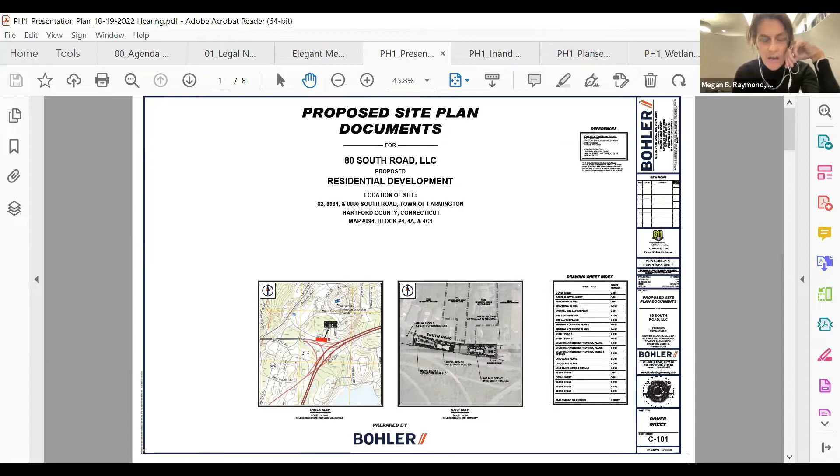Great, thanks a lot, Tim. Good evening, everyone. For the record, my name is Megan Raymond. I'm a professional wetland scientist and registered soil scientist with SLR. As you are aware from our first meeting, we described our involvement with the property. Bruce, could you please put on the next slide?

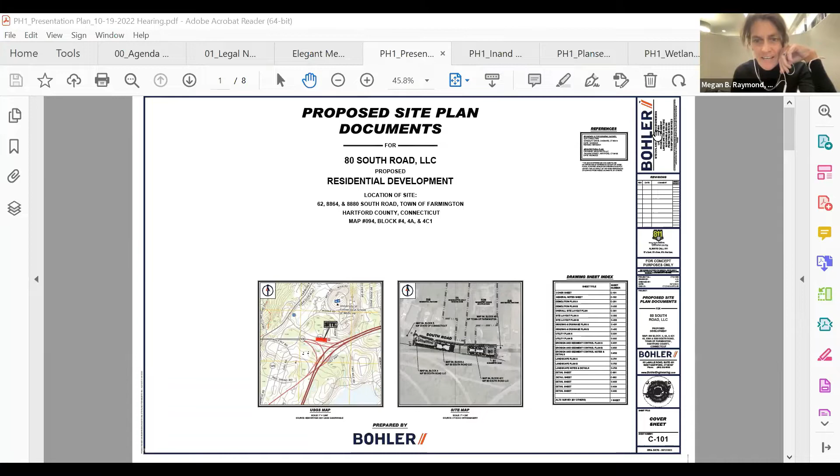I think we might have an existing conditions slide, maybe the one with the aerial on it. Perfect, this is great, thank you. I became involved in the site actually, well...

...at the 8864 site, the central property, in 2018 for the Andy's Italian Kitchen application. But what we have here tonight, and obviously we have north pointing straight up on this map, the project is comprised of, or the site that we looked at, the study area, is 3 parcels: 62 South Road at about a half acre, 8864 South Road at a little over an acre, and 8880 South Road at 1.4 acres to the east.

Two wetland resource areas exist on the site. We have a forested wetland system with poorly drained Wilbraham silt loam soils derived from glacial till, and then a drainage corridor with ordinary high water demarcated that flows approximately 110 feet to the south through the site.

This area picks up some drainage, and it looks like it was ditched. There's a wetland system between Middle Road and South Road. It enters the site with twin 36-inch pipes, exits the site or a little bit off-site to the south, adjacent to the I-84 connector, through a twin 36 plus a 12-inch pipe at that point. Drainage from this area is then conveyed south onto Batterson Park Pond, with the Connecticut River as the eventual fate of drainage from this area.

The topography on the site is relatively flat, but we do have a slight pitch to the east on the western side of the wetland, and to the west on the eastern side.

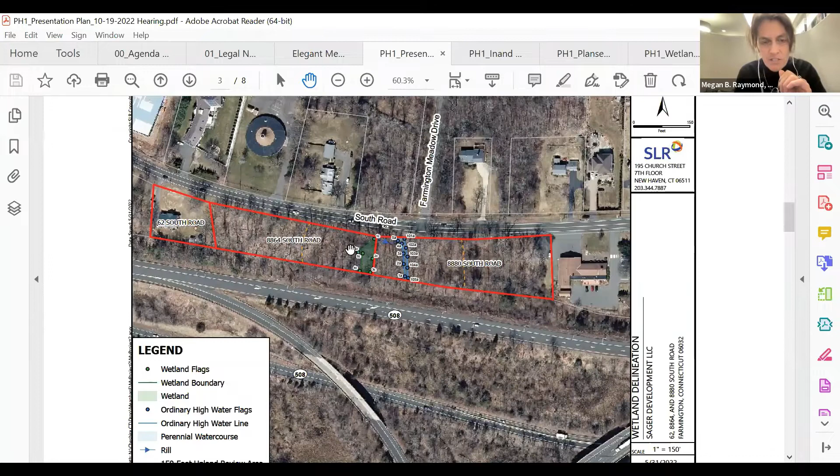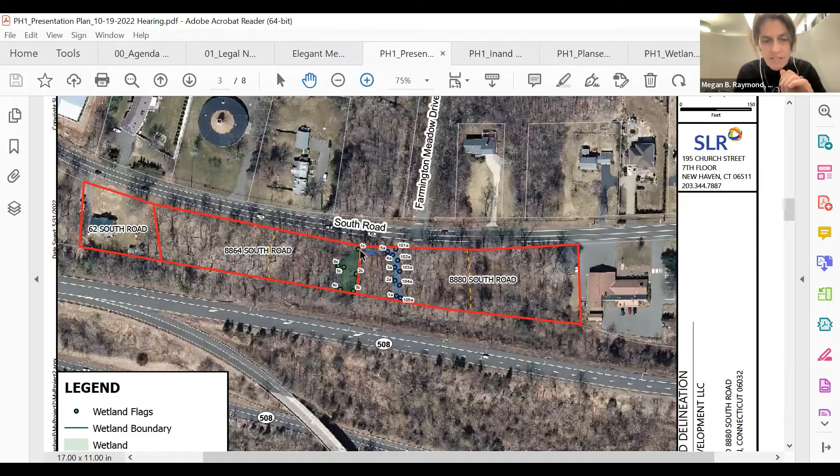Functionally, in this forested drainage area of about 2,000 square feet—quite small—we do see seasonal inundation of about a 12-inch water column. Because of that, we went through in 2021 and completed a vernal pool investigation, comprising site visits during the seasonally opportune time to identify breeding amphibians. We did not see any indication of that.

With our site visits, morphologically it's potential, but the water column is quite shallow, and we're looking at a fragment of habitat here given the amount of development to the south, north, east, and west. Functionally, the wetlands do provide some nutrient assimilation with the depression.

The primary function of the watercourse is generally conveyance, and the functionality of these systems is somewhat constrained by their size.

Overall, collectively, the 2.92 acre project area has wetland resources between the watercourse and the wetland occupying about 2%, but we're looking at about a 44% occupation of the upland review area that extends to the west and east. In between, we have about a 0.2 acre area of upland between the watercourse and the wetlands, demarcated by a shallow stone wall.

That is a summary of the existing conditions, and I'll turn it to Jeff to describe the site plan. Thank you very much.

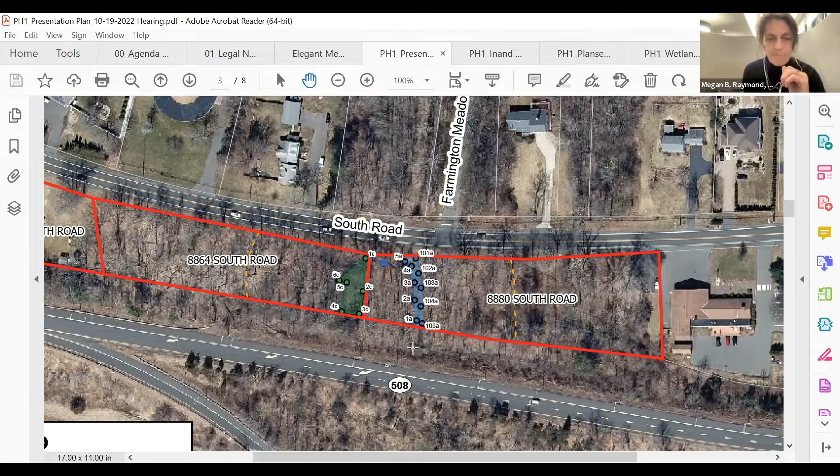Thank you, Megan. Bruce, can you go back one slide to the overall site plan? Good evening. For the record, my name is Jeff Bord, professional engineer in the state of Connecticut with Bohler Engineering, located at 65 LaSalle Road in West Hartford, Connecticut.

I have over 16 years of civil engineering experience in a variety of sectors, including the nature of the project before you this evening. Our office prepared these site plan documents that are before you. As Megan described, existing conditions consist of 3 parcels: 62 South Road, 8864 South Road consisting of 1.57 acres, and the 8880 South Road portion to the east consisting of 1.35 acres. North is to the top of the page on this exhibit.

What you're seeing here is an overall site plan depicting the 2 buildings and the 2 multifamily residential structures that flank either side of that existing channel Megan described. Building A to the west is a 36-unit, 3.5-story structure with a footprint of 11,350 square feet, while Building B to the east is a 3-story structure with 29 units consisting of a 10,425 square foot footprint.

On the left-hand side, Building A, we provided 2 full access driveways onto South Road, where we're proposing 52 parking spaces, 2 of which are handicap accessible. We've also provided an amenity space to the east of Building A consisting of porous concrete, along with several patios for the ground floor units.

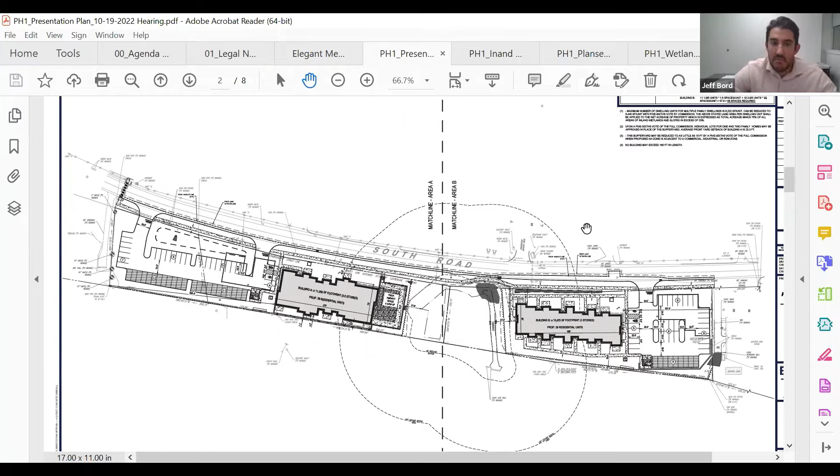Building B to the east has just the one full access driveway onto South Road. We're proposing 52 spaces, 2 of which are handicap accessible, and we have similar porous concrete designed in conjunction with town comments we've received to the south of both buildings A and B.

We do appreciate that Farmington is one of the few towns that goes through such a thorough review, and we really feel that it provides a lot of value to the project and the overall plans itself.

So to Megan and Tim's point, we did receive that letter last week from Bruce and staff. We've gone through all of those comments and are confident that we can address all of them and submit a response to the comment letter that basically says exactly that and what the plan changes are. We're also confident that the plan changes from what you're seeing before you this evening will be rather minimal, even though there's quite a number of comments that we're going to be running through.

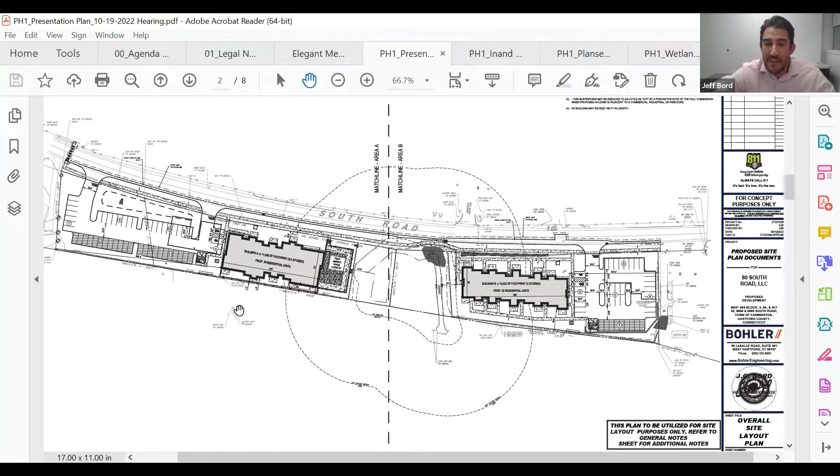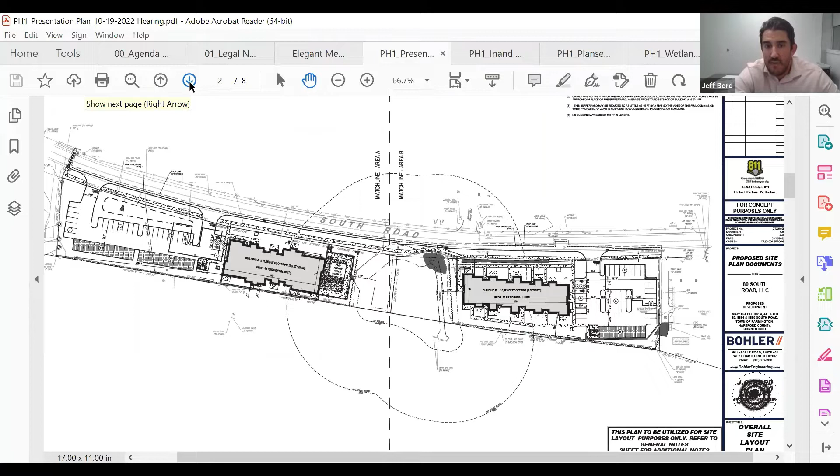With regards to stormwater drainage, starting on the building A side, and holistically for the entire development, we have complied with the 2004 Connecticut Stormwater Quality Manual, as well as the MS4 permits currently in place in town. We did our best to match the existing drainage patterns on site, which currently drain on the western side, going from north to south, then flowing east to the existing stormwater conveyance. On the eastern side of the site, it also heads north to south, but then heads west towards the existing stormwater conveyance culvert. So both properties collectively head towards the center of the site to the south, and then go under those two culverts that cross underneath I-84.

So what we looked to do from a design standpoint is basically match the existing flow patterns that exist on site. We looked to reduce the peak flow rates for the 10, 25, and 100-year storms. I believe one of the comments we got last week was to also include the 50-year storm, which we are happy to do.

There's a series of stormwater BMPs that, on a site this small, a lot of times we're not able to incorporate natural and subsurface structures. In this case, we were able to include several areas for above ground infiltration. We have a couple of below ground infiltration basins. We were able to introduce porous concrete on the south of both buildings in the parking areas and in the amenity space. On building A particularly, we incorporated a swale along the front of the building, between the roadway and the building itself, that went into a series of two rain gardens prior to exiting via a level spreader into the wetland area there. So the goal was to mimic existing drainage patterns on both buildings A and B, respecting the wetlands and the like.

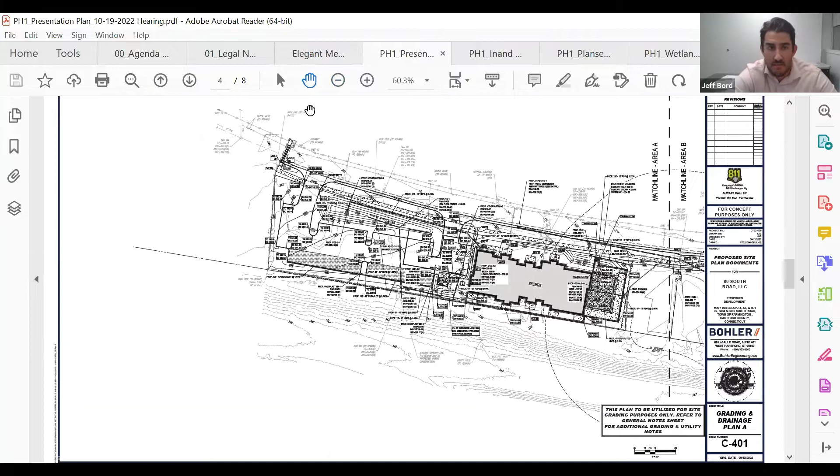So we prepared this slide, and it's basically just a blow up of the existing grading and drainage plan. What you're seeing in red, and it's kind of hard to see on this plan, is the red tree line. Those are basically from the previously approved drawings that this commission had approved a few years back for both of those applications. We just wanted to show that we started with that in our design plans as far as where we were laying these buildings out, to try to respect that even further.

So on building A, we shifted it even further to the west, away from that tree line, and it gave ourselves a decent buffer up against that wetland boundary there. Similarly, on the east side, we went through multiple iterations, and by the third iteration we kept kicking it further to the east to get even further away from where that previous line of disturbance was.

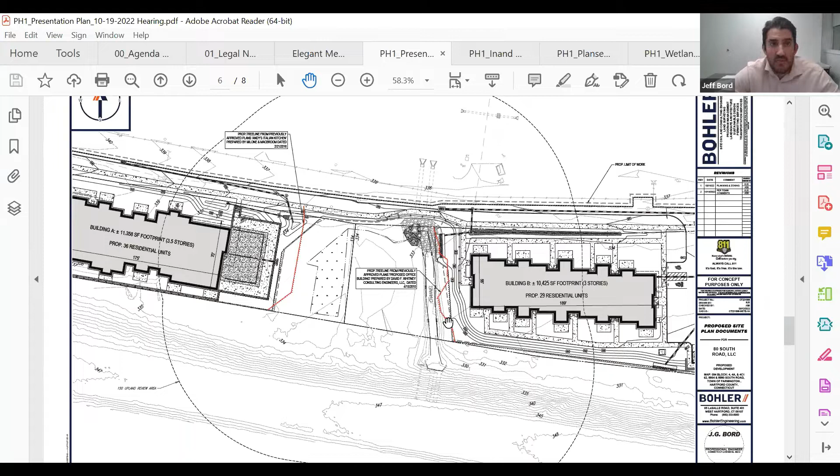We did implement a soil erosion and sediment control plan that is consistent with the Connecticut Erosion and Sediment Control Guidelines. Basically, we have silt fence along the perimeter. One of the town comments we got was to provide silt socks in addition to silt fence, so we've done that as well. We'll have inlet filters on all the catch basins, and a temporary construction entrance and soil stockpile surrounded by silt fence and silt socks as well.

And that's a high level overview of the civil drawings. At the end of the day, we're not disturbing any wetlands directly.

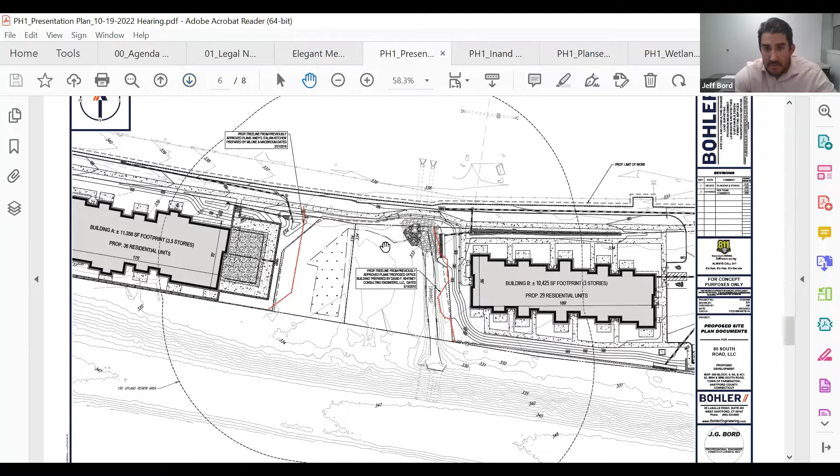I think part of the feedback we received, and an important piece of feedback, was, if you zoom in right there where your hand is, from our site walk, the commissioners will remember, originally we had a drainage design that discharged the curbed roadway runoff from the DOT highway directly into that culvert there.

When we were on site, I know that entire area of riprap had been eroded away and destabilized, if you will. A lot of the commissioners had concerns and requested that it be replaced. So on the set of plans that we'll be revising, in addition to addressing Bruce's comments, we'll also be proposing to repair that riprap and stabilize that channel back to what it should have been under the proposed condition.

On top of that, as you can see in this plan, particularly on the west side for building A, we've pulled back that discharge point from the DOT right-of-way into an actual rain garden on our site that will then overland flow and level spread into that wetland area. On the east side for building B, we did something similar, where instead of a direct connection with a flared end section that could potentially erode that bank further, we provided a level spreader with a slot drain that comes out to discharge just that little infiltration row in the front.

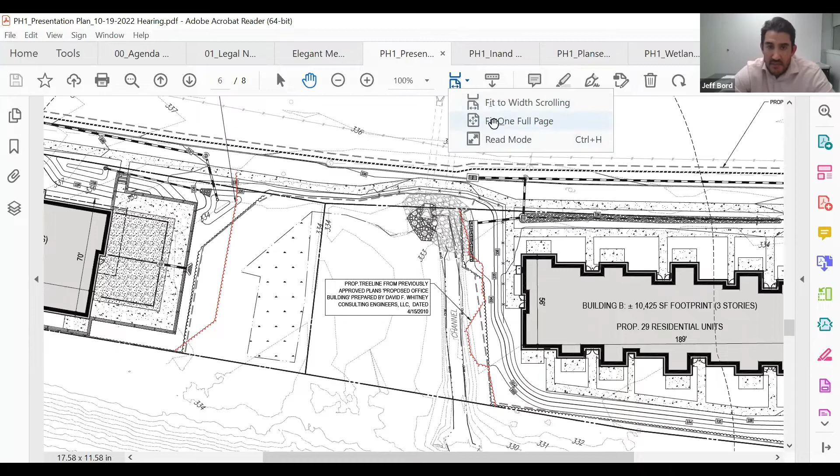So that's a very high level of input we received from that site walk that I feel will benefit the project moving forward here. So with that, I'd be happy to turn it over to Megan. I think she was going to close with some of the wetlands information here, and I'll be happy to answer questions after Megan's complete.

Great, thanks a lot, Jeff. So just to advance Jeff's description here as it relates to wetland impacts, since our last meeting we did prepare a wetland impact analysis that focuses in on the potential modifications to these resources as a result of this site work. As Jeff described, we do not have any direct wetland impact for the project. There's no direct impairment of the wetland area or the water course.

So when we then look at potential modifications to these resources, we focus on indirect impacts, and those relate specifically to stormwater management and sedimentation and erosion control. The site is long and linear, but there are a lot of opportunities, and Bohler's done a great job incorporating low impact design elements to allow for improvement of water quality, while also addressing the potential modification with increase in impervious through additional stormwater volume.

Both of those features in combination will allow for maintenance of hydrology of the wetland, as well as maintenance of water quality within this small watershed, which is about 0.16 square miles of overall watershed that we're looking at holistically for the site.

The site lies within that area. Sedimentation and erosion control is going to be managed on the site. Obviously we have a very flat site, so that works well with that. The use of retaining walls will also serve as permanent demarcation and assist in sedimentation and erosion control in that regard.

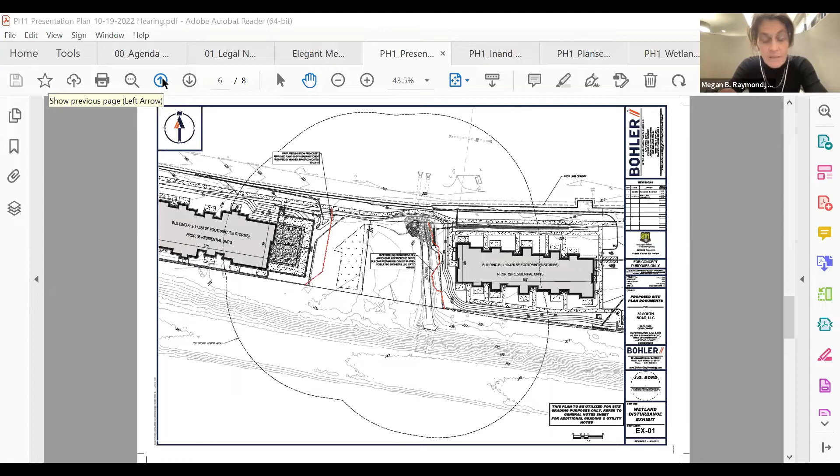So there was a lot of thought looking at the site in laying out the property and the project to maintain buffers to the wetland and the water course. The 8864 and 8880 sites both have previous approvals on them. 862 South Road has no wetlands, no upland review on that parcel, but obviously a single family dwelling was there.

But the limit of disturbance was an important exercise to overlay, just to make sure that we weren't doing any additional encroachments into the tree line that wasn't previously approved. And we actually provide a little bit greater buffer to the wetlands.

Looking at the drainage channel specifically, early on, given its feature as an engineered feature, there were potential thoughts of piping that and having an ability to access the site inter-site—not use the sidewalk, not use South Road, but have an inter-site connection. But looking at the functionality of it, even though it's small, that alternative was considered and discarded because we could maintain the corridor, maintain the resource in combination with that little bit of upland between them, and also achieve the project purpose of increasing the housing typology in this part of town.

So holistically, we're looking at this project as no adverse impact to wetlands and water course on the property. We did run through this before, but in terms of significant activity, we did evaluate the activities as it relates to significance as stipulated in your regulations. Obviously, we have no direct wetland impact, so we don't have any deposition or removal of material from the wetland or water course. We're not modifying the natural channel or dynamics of the watercourse.

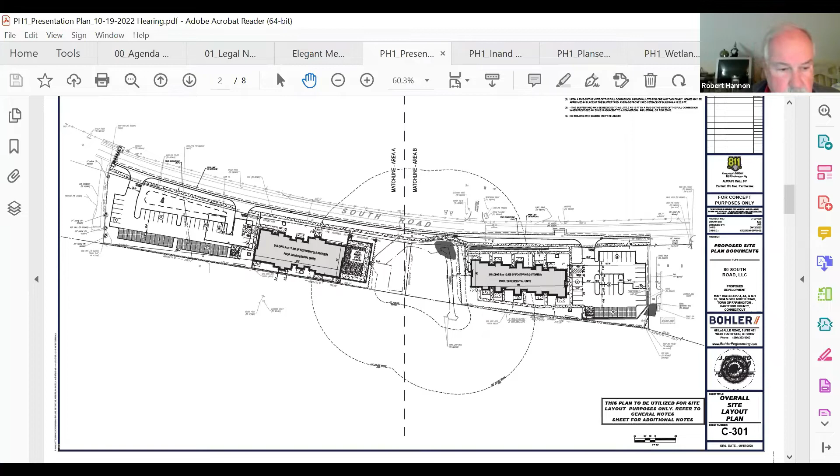There you go. Bruce, can you hear me? Yeah, I was trying to get to my unmute. Okay. I thought it might be me. I really don't have any specific questions. I just was looking at the areas where the drainable bituminous is being used.

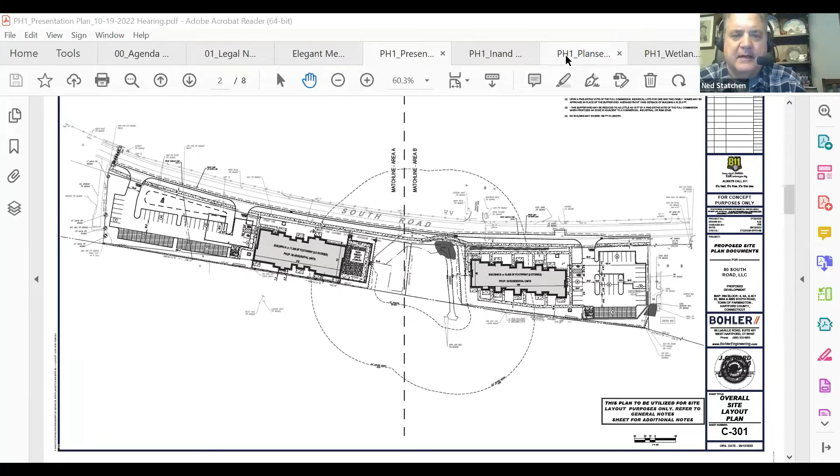I guess a little more information on how that works, and how do we be sure that the material that makes up the bituminous mix doesn't, with the water going through it, leach any kind of chemicals into the soil.

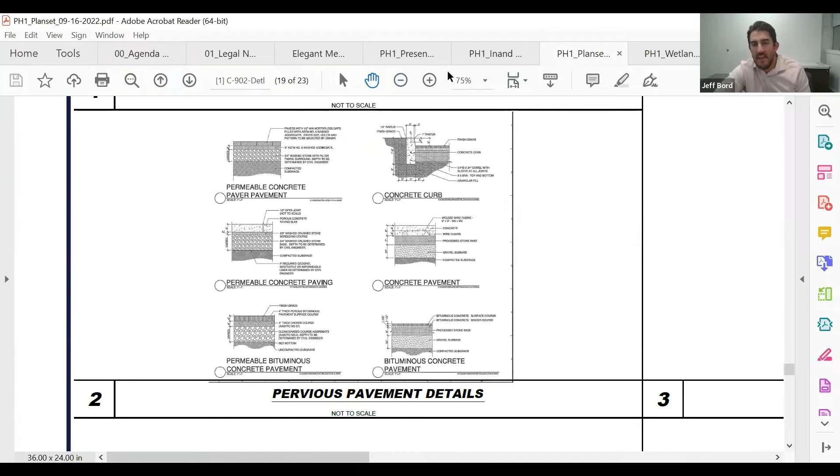Yeah, I can take that. I know that was a comment we received early on in trying to incorporate these natural BMPs. We provided an under drain as an added measure, and this was done at one location in town that worked rather well with the manufacturer that installed it. We provide an operations and maintenance manual for the cleaning and vacuuming of those pervious areas. The under drain basically takes that storm water and puts it into an underground infiltration system with a sediment forebay and an isolator row within it to treat water quality. So there's a belts and suspenders approach with regards to that porous concrete. At the very south end of that parking structure, where that porous concrete is, there's a perforated pipe that carries that water to the underground system.

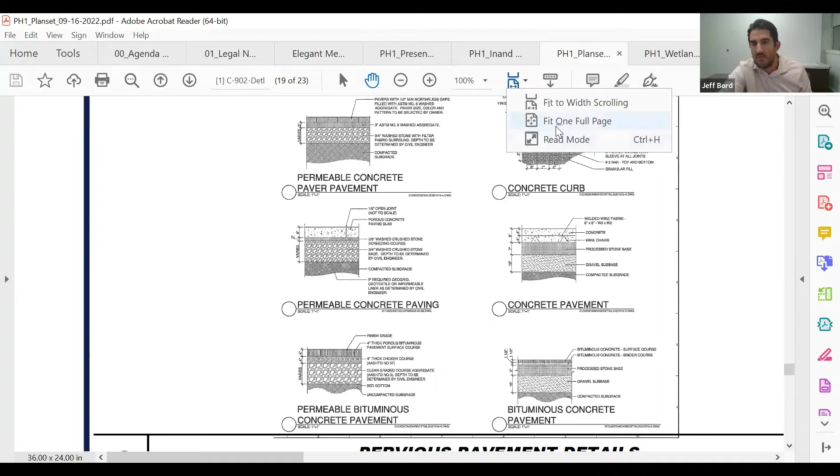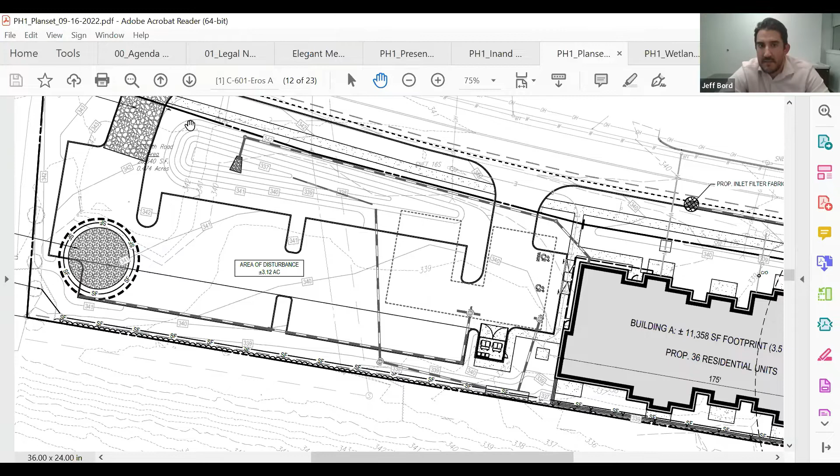I was blanking on the name of the coffee shop, but I think it's Rebel Dog Coffee that implements it, and it was well done at that location not too long ago. Here's the pipe, here's the permeable pavement underneath. It comes in and then into the storm drain system right there. Does that piping handle the roof drainage as well? The roof drainage in this case, given the space we had, goes over to the infiltration basin we provided in front. We don't have a wild seed basin mix associated with it. Okay, thank you. You're welcome.

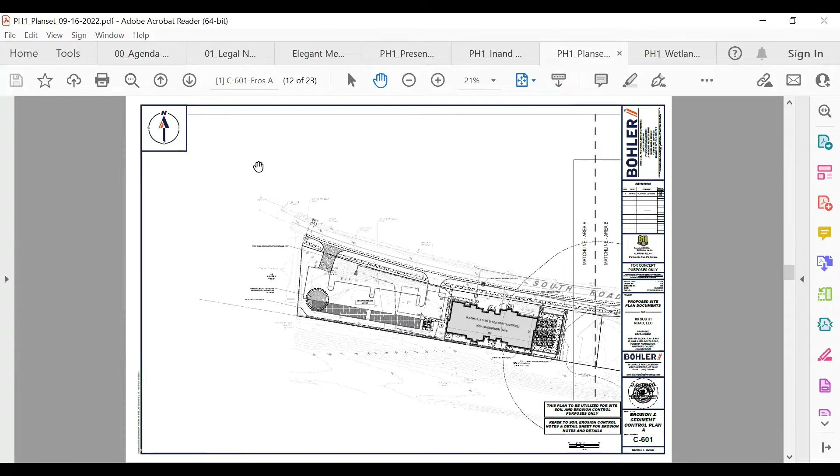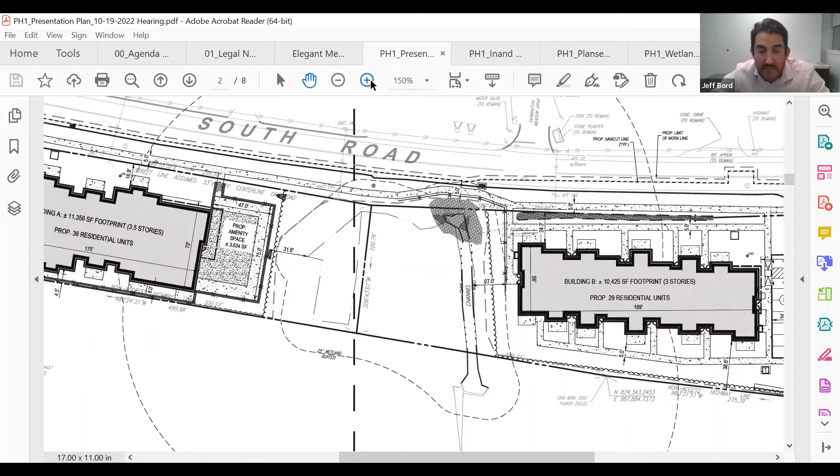Okay, thanks Ned. Mark? Yeah, the only question I have - I realize both buildings are within the 150-foot review area, but how close is any construction to the wetlands area and the watercourse? It's hard to figure out what the distance is. On the west side in particular, it's close to 30 feet, 31 feet I believe. On the right side, I think it's close to 25 feet, 27 feet. Yeah, 27, that's what it says. All right, I can see it better now. Thank you, that's all.

Thanks, Mark. Robert?

I don't have any concerns. I think the project team, specifically Jeff and Megan, both tonight at the public hearing and also during the site walk, covered the project well. I think the information tonight addressed the indirect impacts, and the project team took into consideration all the normal items we would look for. So I don't have any concerns about the project. That's the end of my comment.

Okay, thanks. Neil, I may have done it out of order, but you're next. It's okay.

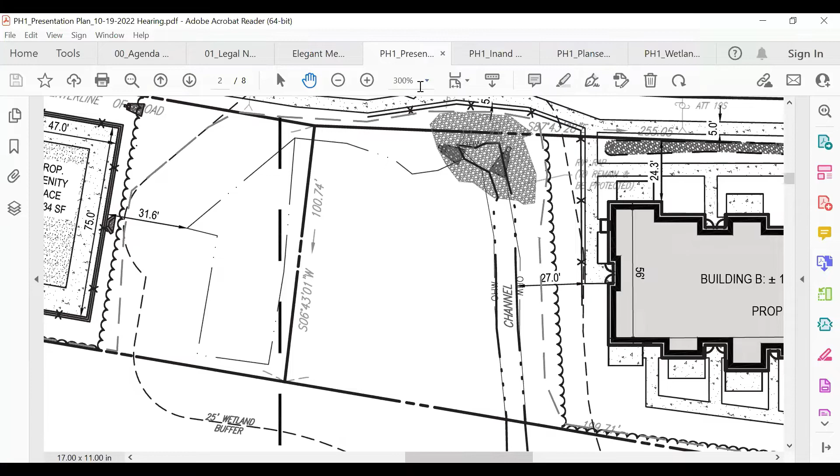Just going back to the permeable bituminous, will traffic or cars be parked on top of that, or is that off the side of the parking lot? And number two, you showed us where it went through piping underground on the west side. Can you illustrate that on the east side as well, please?

Sure can. So there is parking on top of it. It was similar to that Rebel Dog Coffee application, where on the low side of the parking lot, you incorporate that pervious asphalt. Similarly, there's a dashed line towards the north end of that parking lot on this plan.

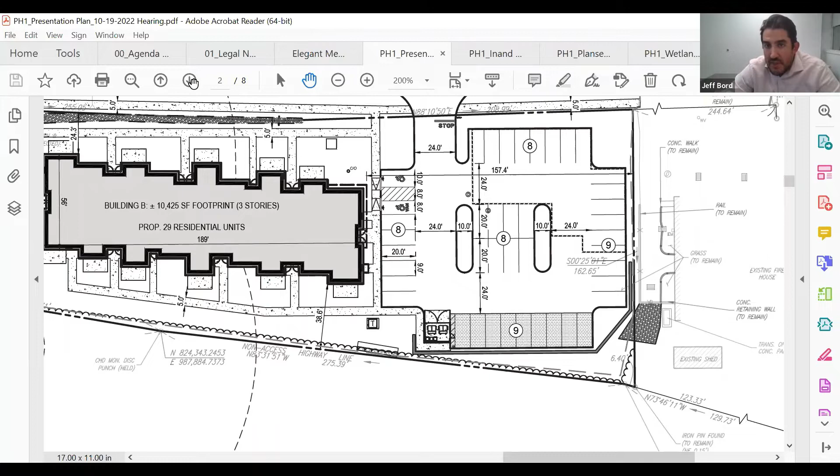If you go up to the top right, Bruce. Right in there, there's a dashed line. That's the underground detention. So similar to the other side, that infiltration, there's a perforated pipe that goes into that basin before discharging to the level spreader just to the bottom or south of that transformer.

If you zoom in. There we go. Down this page, next page. They're both very similar in how they connect to that porous pavement.

So if you zoom in on that, there's a pipe that comes from the porous asphalt up into the underground detention system. And then there's an outlet pipe that goes down to a level spreader that basically discharges the surface water to where it's currently going today. And then it goes through a natural swale along the southern property line into that existing culvert. So there's multiple measures of water quality treatment throughout the process prior to it getting to the channelized stream that's there.

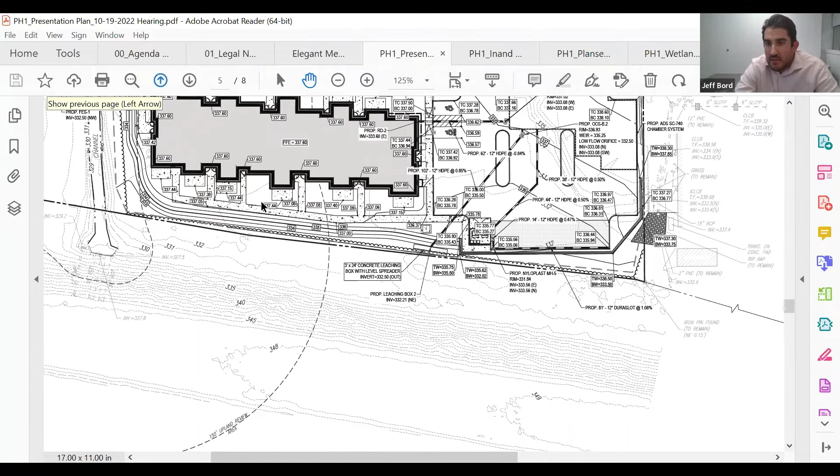Okay. And maintenance on that, you know, with cars on top of it, compression, things like that. Any thoughts on maintenance and how often it might need to be replaced or repaired?

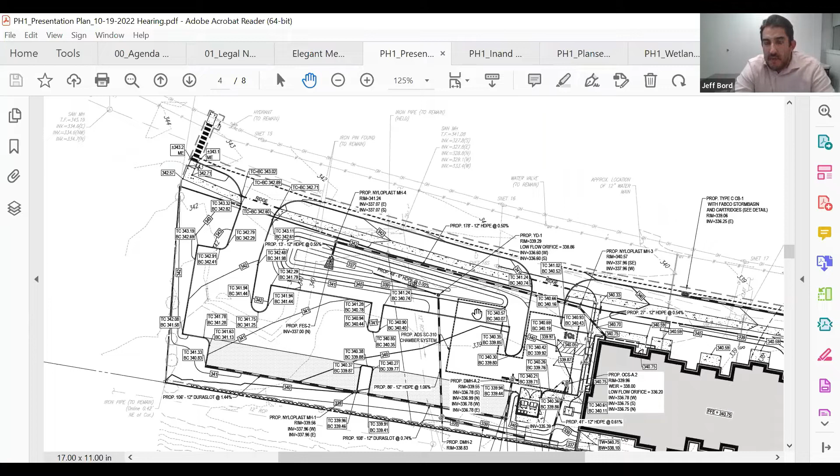I'll double check, but we do prepare an operations and maintenance manual as part of our drainage report, and it gets buried in the back of a 400-page drainage report. But in that document, it describes the measures for the contractor and owner to take as far as all of the stormwater BMP - not just the pervious asphalt, but the catch basins, the rain garden, the underground detention systems. Basically what it does is there's a frequency of cleanings and methods to clean out these different structures at various times. It might be biannual. I'd have to look to see, but it's at the manufacturer's recommendation as far as the vacuum truck that comes out to clean it.

Neil, we usually require this to be vacuumed. These parking lots don't get swept anymore. Because it's permeable pavement with an open grade, they come through with a vac truck and they'll actually vacuum out these areas.

Okay. Any concerns about settling, or does it have to be rebuilt over a period of years since cars will be sitting on top of it?

Personally, I don't have concerns with that. I think the product has come a long way. I know from experience, up in New England, it hasn't been used quite that much. I think in the future it's going to start to be utilized more often as they perfect the product, and more contractors become familiar with laying it down. Some of the earlier installations were rough in the sense that contractors didn't know how to install it. I think, as you've seen at the Rebel Dog Coffee, that's proven to be installed very well, with good success. So I think it's something you'll start to see incorporated more and more, even up in New England here.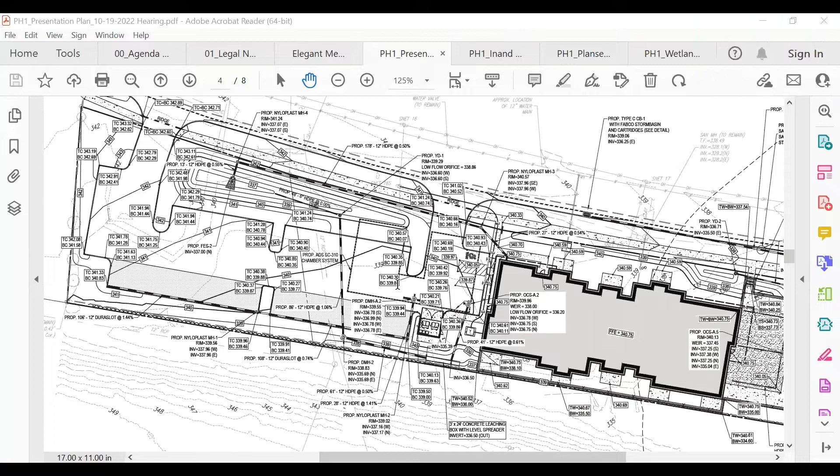Okay, thank you. Was that it, Neil? Yes, nothing further. Okay, thank you, Dave. No questions.

Bobby? No questions. I think it's a very well thought out program, with great explanation, both here and through the walkthrough.

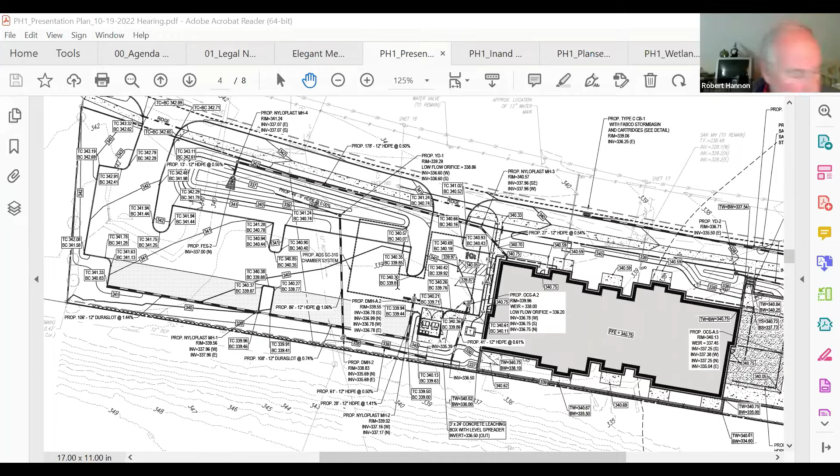Okay, as usual, I have some questions. Part of what was discussed dealing with the parking lot. Can you talk briefly about snow removal and then any type of treatment that might be applied to the parking lots in the wintertime?

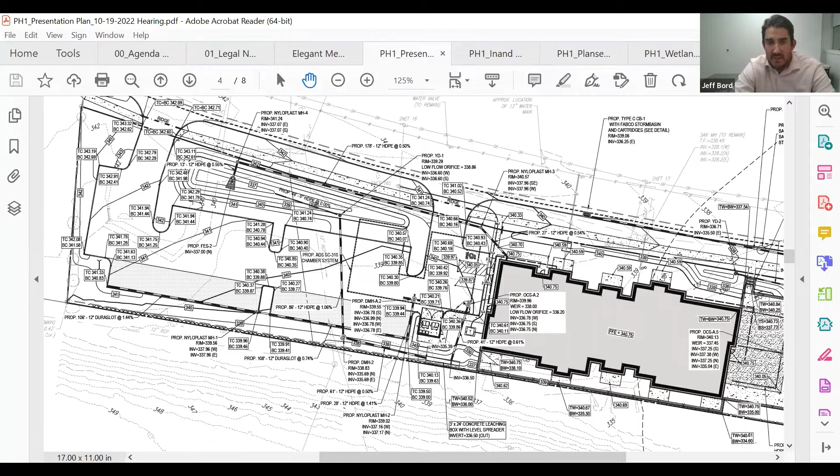As far as the treatment, I may defer to Jeff and Phoebe here, but the snow removal areas itself, we do provide snow shelves in concert with our landscape architects. Along any of the perimeter parking areas, they provide landscaping that's more hardy and susceptible to having snow piled up. Given how small it is, there are areas along the perimeter where you could stockpile snow. In the event of a 1 or 2 foot event, it may have to be trucked off site depending on where that is.

One of the benefits of what we're proposing with the way everything lays out is that there are multiple areas on site where that snow melt would get into a stormwater basin, which would be treated for water quality, where a lot of projects don't have the benefit of having the stormwater best management practices spread throughout the site. That goes into our site design considerations as far as where we provide curbing and landscaping. So I think there'll be plenty of room for snow storage for a parking lot this small. And then how about the treatment?

The treatment, I don't have that information as far as what kind of treatment is used, whether it's salted or... Well, this is why I'm asking, because for example, if salt is being used, what kind of impact might that have on the wetlands? And if sand is being used, what kind of impact might that have on the pervious concrete?

Chair Hannon, Jeff Bord, can you hear me? Yes, we can hear you, Jeff. Okay, I hear an echo, I don't know why.

We use the DEP approved ice melt. I have to get the exact product name, I forget what it is, but it's not sand and it's not salt, it's whatever that... perhaps you know the name of it. I can get it for the next meeting.

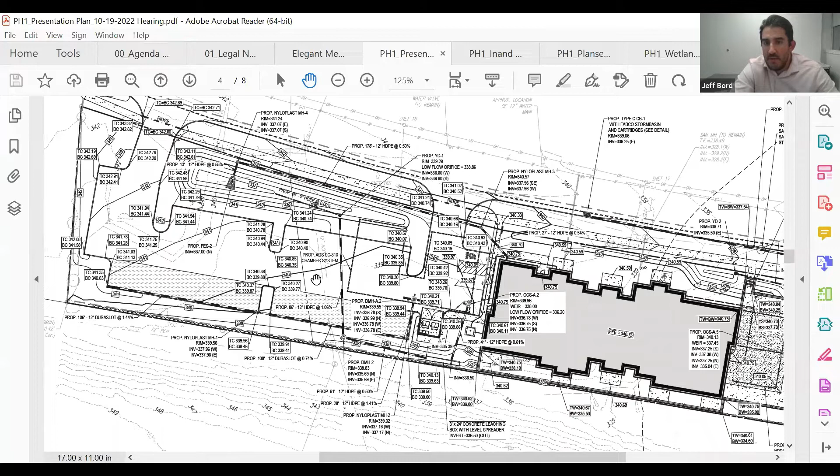Okay, no, thanks. Bruce, can you bring up something with one of the slides where we have a better shot of the eastern building? Yeah, that one is good. If you can blow that up a little bit, please.

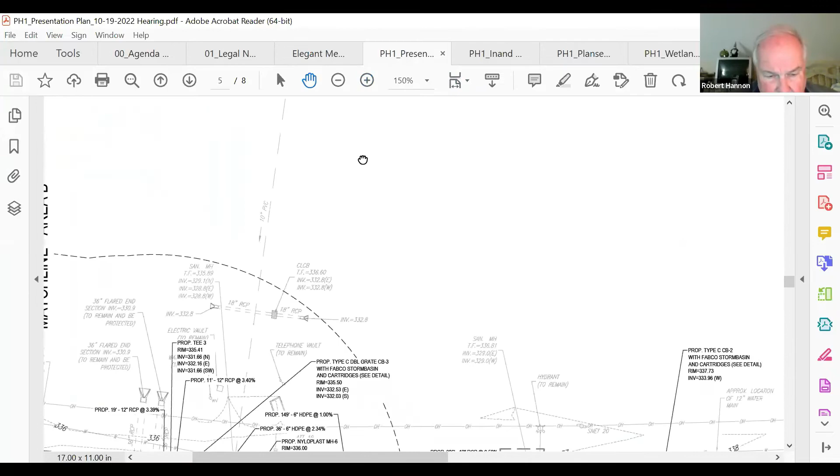This is just a general question in terms of the grading that's being proposed on the site. I'm assuming that there's room there to get both the silt fence, which you're talking about, and the silt socks down at the base of the hill, so that nothing is really coming off onto, I believe that's state property for the highway. So is that correct?

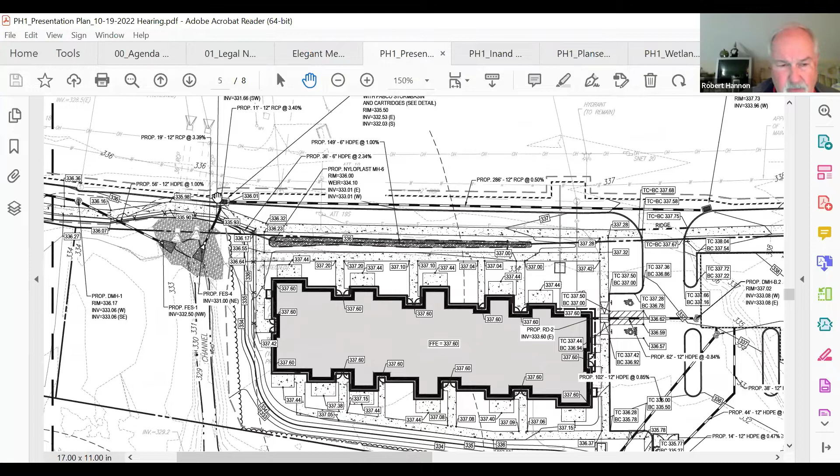That's accurate. Yep. Okay, and then the one other, it's not so much a question, but as my understanding is that the drainage pipes that are there, they were man-made, installed a while ago. I'm assuming though that the channel was pretty much the same thing. I mean, granted, it's not a pipe, but based on what I remember out there, it appeared to be man-made. There was riprap.

So I'm kind of looking at this as maybe more of a maintenance process to refurbish that area. And yeah, the riprap is part of it, but there also seem to be a lot of growth, smaller trees and things of that nature within that channel area. Are those also coming out? That would be the intent, and specifically in that area.

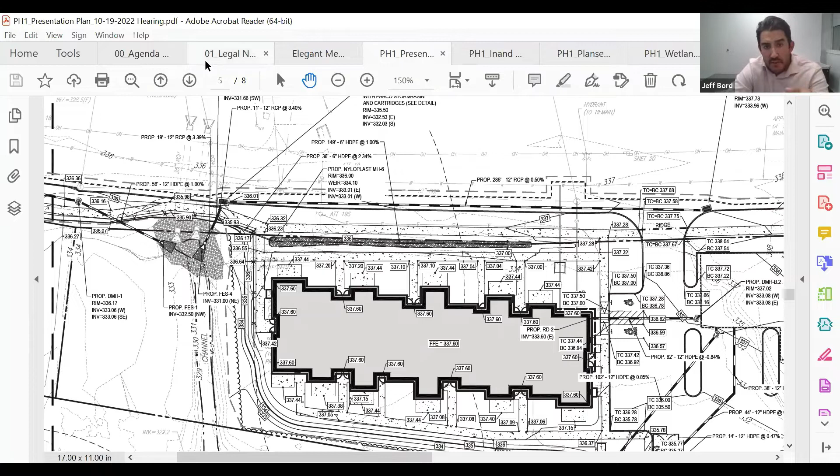Bruce, I don't know if you can go to one of the other plans, this was the old plan. You could see the direct discharges into that area. Yep, that was the initial plan we submitted right from the DOT right of way. The colored rendering had been updated to show what that looked like, or that wetlands exhibit.

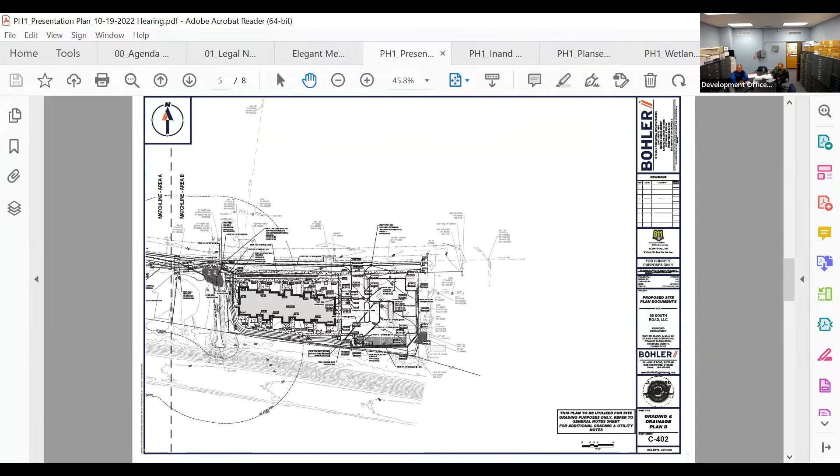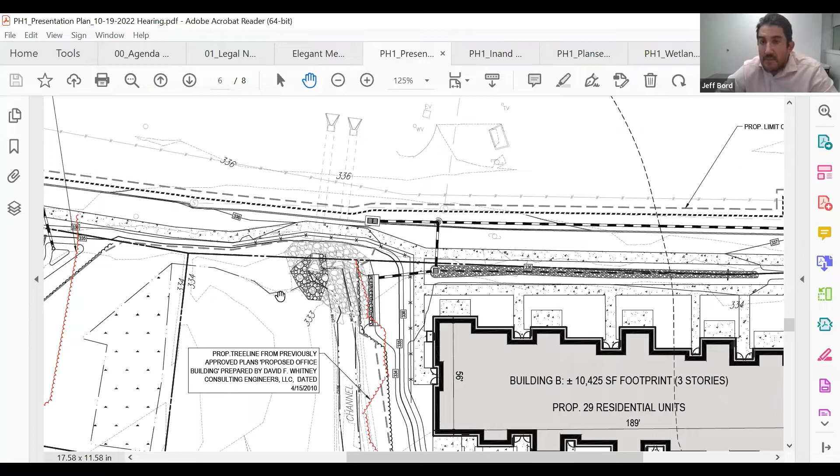If you zoom in on this, I think this one had been updated for our new stormwater plan. You can see those direct discharges are now gone. That area of dark riprap was the area in the field we identified, where there was some plant growth, but basically just soil where riprap should have been had washed away, and there was nothing there. So the intent is to clean that whole area up and put back the riprap that should be there, to help stabilize that channel.

Okay, and when we were at the site, if I remember correctly, there also appeared to be a drainage swale located along where the sidewalk is being proposed, draining into the area where the riprap is gone. What's happening in that area - you're picking up some water off the street and redirecting it, but what about that swale located close to the road?

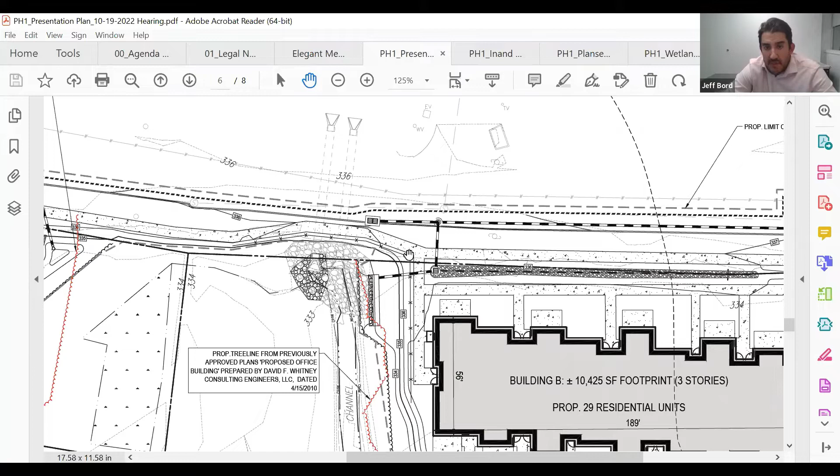Yeah, that's a great question. On building B, what we have on screen here - you see there's a hatch right in front of the building, a stone hatch with a little yard drain. Because we're curbing this, we're taking the water from the DOT right of way and connecting it with conveyance systems into that infiltration trench. That infiltration trench we provided in the front will help treat water quality from the roadway and the area that was swaling, prior to it discharging into the existing culvert.

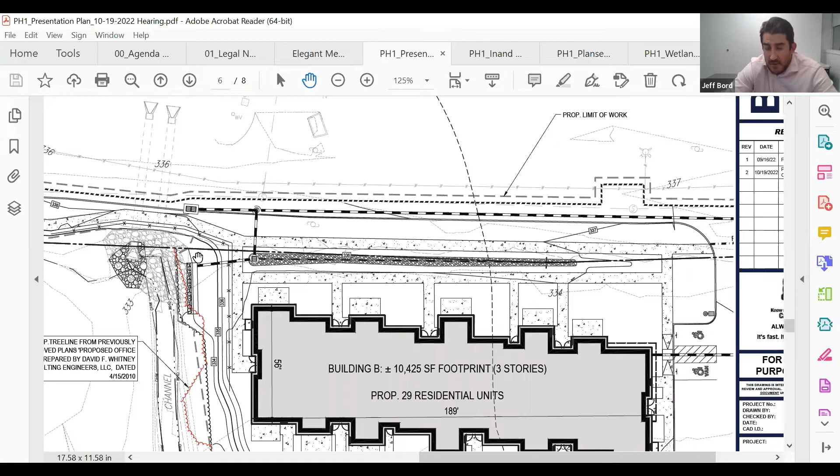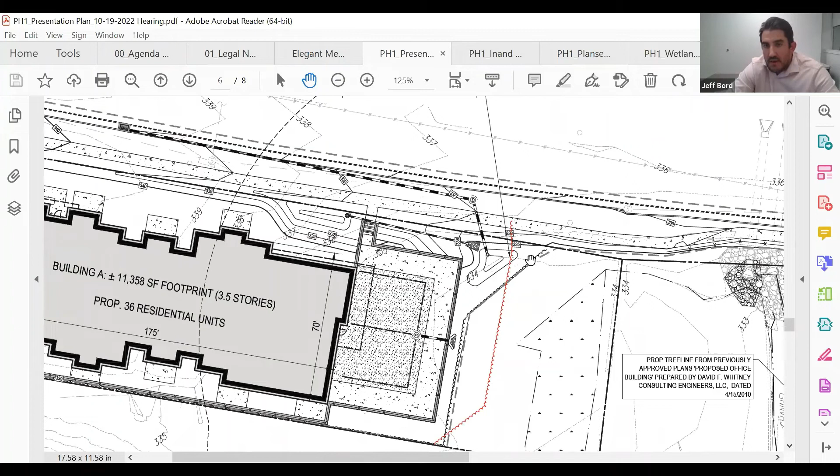On the building A side, the west side of the site, we had a bit more room to play with, so we were able to curb that street as well. We provided a swale on the south side of the proposed sidewalk that makes its way into that rain garden. In concert with comments we received from you folks, we piped that to another rain garden, which will overflow into the wetland area about 30 feet away from the wetland, so there's no longer any direct impacts over toward that area. In both cases, we took those existing swales and proposed natural stormwater features to reroute it.

And if I'm not mistaken, I believe that swale was caused by a low point in the road with no curbing, so that's where water concentrated its flows. Correct. So now we've designed catch basins within the state right of way, which will have to be reviewed. Once we get through local approvals, we'll submit to the DOT for an encroachment permit, where they'll review the curb cuts and drainage associated with this. They'll be very interested, especially given that most of their drainage now flows untreated onto our site, and the fact that we're doing stormwater conveyance in a DOT right of way. They'll thoroughly review the stormwater, as well as the town staff.

Okay, that's all that I have. Thank you for the answers.

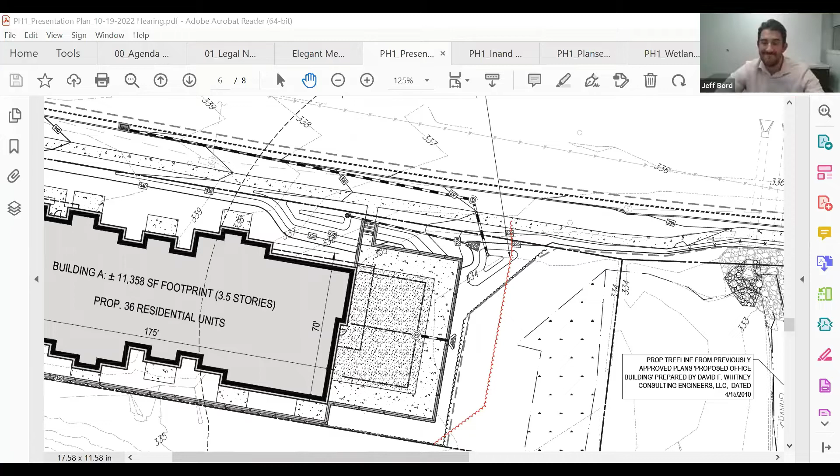Next one is 114 Red Oak, but I'm not seeing any of the applicants online here. Oh, sorry, Dave's with the 80 Colt Highway application I think. Yeah, no, it shouldn't be. I know, I just don't notice that, but I don't see it on here.

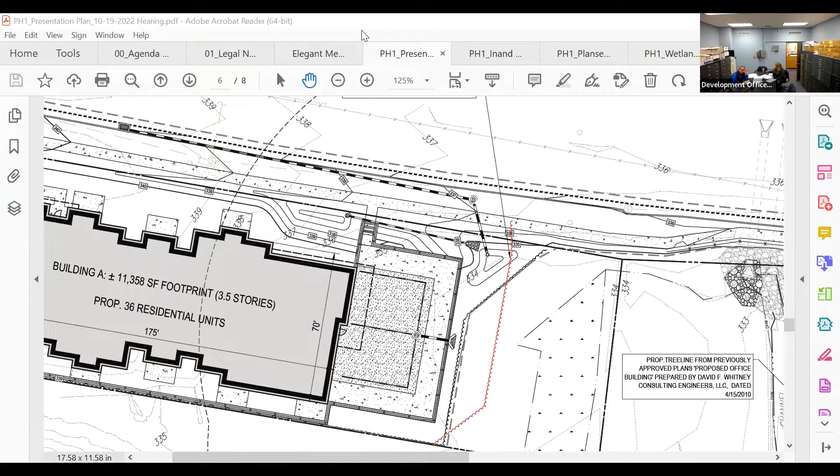Is anyone here for the Copper Mine Road application? I guess not. I sent them everything too. Well, they might have been taking a gamble that the public hearing would go longer too. Could have. We'll see if they're there at the end.

All right, so we'll table that one for now, I guess. I don't need a motion to table it, right? No, because we're not gonna take it up right now, we'll take it a little later. Yeah, we'll see if they pop in afterwards.

Okay, so next on the agenda is old business, Bulwark LLC, lots 8120 and 8122 Colt Highway.

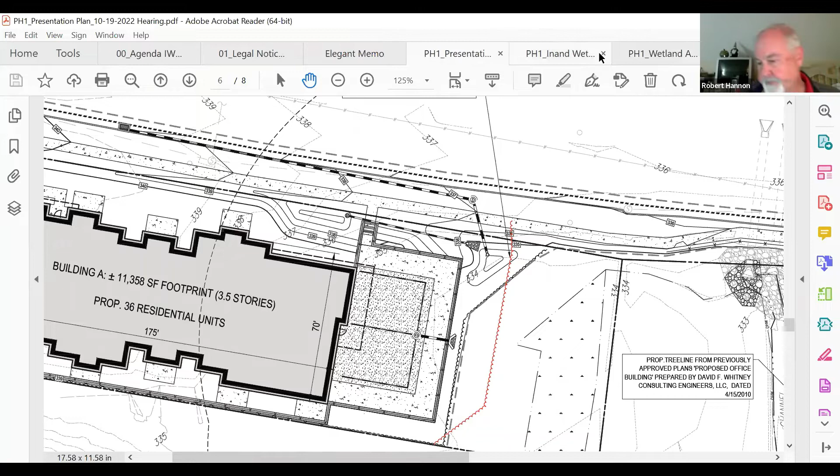This one, and I have the resolutions here. I have the draft for the approval and the draft for the denial. Does anyone want anything else open? I can open up the plan set. How do you want to proceed with this?

Well, I think probably proceed with this, at least as far as just a general discussion to see where people may be coming from on this. So Ned, if you don't mind, the floor is yours. Okay.

Well, I appreciate the designers, several revisions. I know when I was talking, I had asked for several cut corners on buildings and things to try and get a little more clearance away from the wetland lines. And they seem to have addressed all the ones I raised. Again, changing the style of the crossing of the waterway, I thought was a positive, and they enlarged the size of the structure, made it so that we could maintain the natural waterway course. I think that was another good revision.

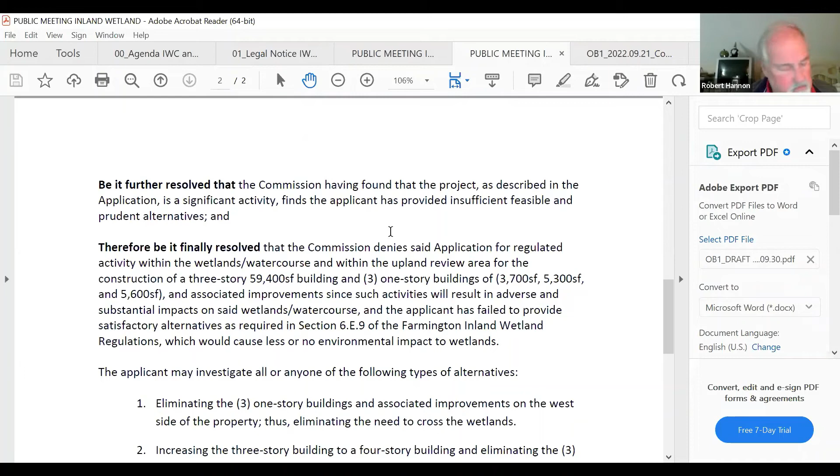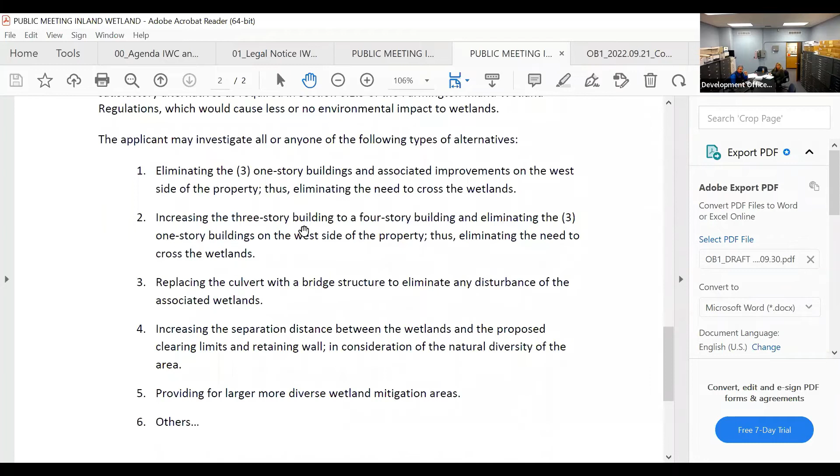Is there a second? I can second that one. Okay, so there's a motion on the floor to deny this application, and Bruce, you've got the comments as to why, correct? Yep, we're pretty much following this resolution that I had drafted up, right? There's nothing everyone wants to add, a takeaway or anything like that.

So here's the reasons right here. Yeah, this is Neil. I heard Bobby say something that I'll reiterate. I don't think we should be suggesting the alternatives. So I believe we should take this section out and just leave it that the applicant provided insufficient alternatives.

Mm-hmm. If you scroll up on that. You have to give a reason. Yeah, usually when you deny an application like this, you have to give the reasons why you are denying it. Technically, you have to provide the rationale. One of them is that there are insufficient feasible and prudent alternatives, but there are also some other issues that I think directly impact this.

So it's not with the intent of trying to provide guidance to the applicant in terms of what they need to do, but issues that we feel are important. So we could rephrase this to say we're looking for alternatives or consideration of alternatives that eliminate the need to cross the wetlands, eliminate or mitigate any disturbance of the associated wetlands, et cetera, rather than giving them how to do that, just stating these are the concerns.

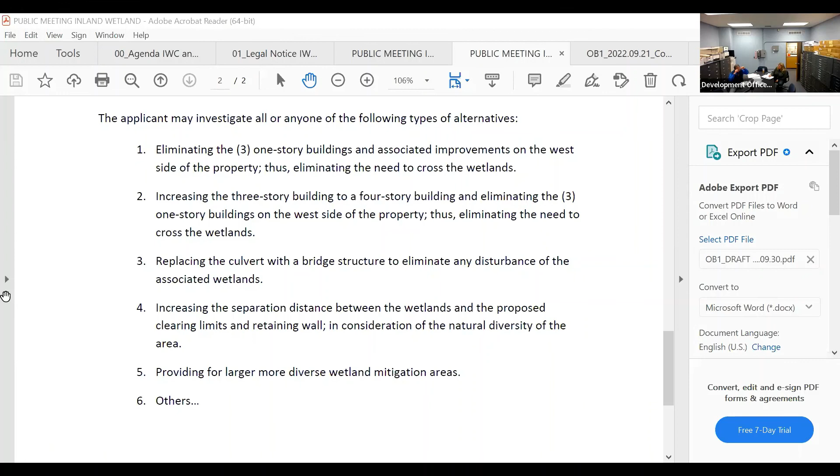Can I get a motion to approve the minutes of October 5th, 2022 for the inland wetlands meeting? So moved, Ned. Is there a second? Second by Esme. Questions, comments, corrections? All those in favor, please signify by saying aye. Aye, aye. Opposed? Abstaining? I will abstain because I wasn't there.

So we will adjourn the wetlands meeting at 8:15 and call the Conservation Commission meeting to order. Looks like a pretty sparse calendar, Bruce. The land acquisition committee meeting was canceled. That's the second one in a row, correct, Ned? Yeah, okay.

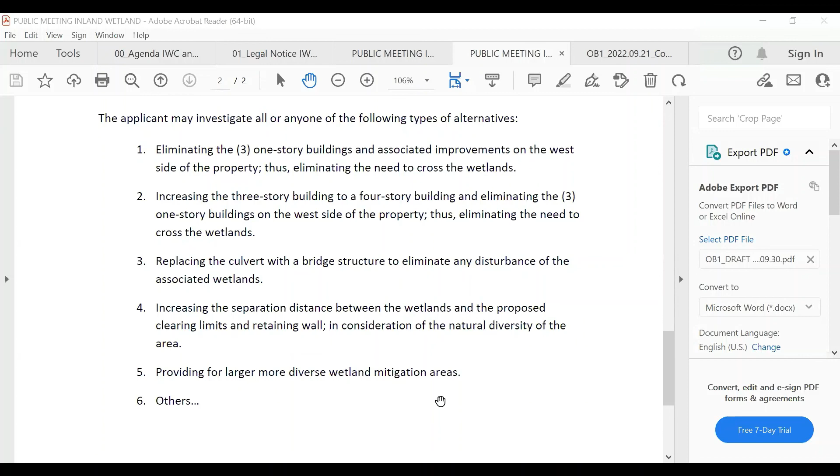If there isn't anything from Bruce's side, can I get a motion to approve the minutes of the October 5th, 2022 Conservation Commission meeting? So moved by Eisner, seconded by Mark. So I have a motion on the floor for the minutes of October 5th, 2022 Conservation Commission meeting. All those in favor, please signify by saying aye. Aye, aye.